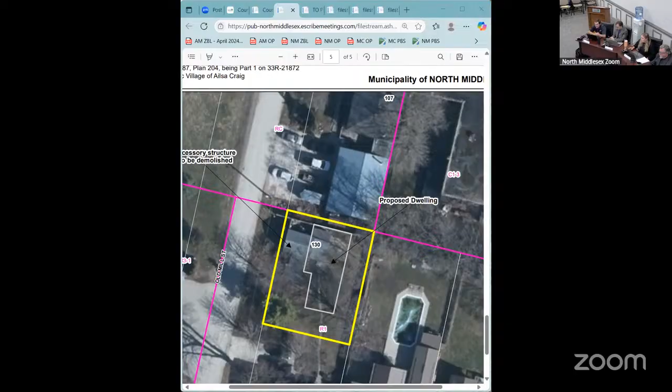This minor variance is for 130 Old Mill Street, located in the western portion of the Ailsa Craig urban settlement area, just south of the intersection of Old Mill Street and Ailsa Craig Main Street. The lands are predominantly residential in nature, zoned Residential Density Zone 1, and designated in the Official Plan as a residential area. The committee may recall that this property was severed from 132 Old Mill Street at the end of 2023, and this application is separate from that severance, specifically for a new residential dwelling on the lot created with that severance.

The owner is proposing to construct a one-story, single-detached residential dwelling approximately 1,100 square feet in size, with construction hoped to start in 2026. They have explored multiple interior layouts and determined that minor variance relief will allow for the most comfortable and functional living space, providing flexibility to incorporate a home office. The design ensures sufficient outdoor green space is maintained, that the character of the area is maintained, and that sufficient parking will be provided without vehicles encroaching onto the road allowance or interfering with snow removal.

Relief is being requested from the front yard setback, the rear yard setback, and the front yard porch encroachment. For the front yard setback, 6 meters is required, whereas 4.5 meters is proposed—this is only for the portion of the dwelling that excludes the garage, as shown on the building envelope map. The 6 meters will be maintained for the driveway and garage so there's no vehicle overhang onto the road allowance and sufficient parking can still be provided on site. For the rear yard setback, 6 meters is required, whereas 4.5 meters is proposed. For the front porch encroachment, 1.8 meters is permitted, whereas 1.98 meters is proposed.

The application was circulated in accordance with the Planning Act to all required agencies and landowners. Any comments received prior to submission of the report are outlined in the table, but generally the Ausable Bayfield Conservation Authority, Canada Post, Enbridge, the county engineer, the Thames Valley District School Board, and the municipality's building department, infrastructure and operations department, and drainage superintendent have all noted no concerns, and no comments have been submitted by members of the public to date.

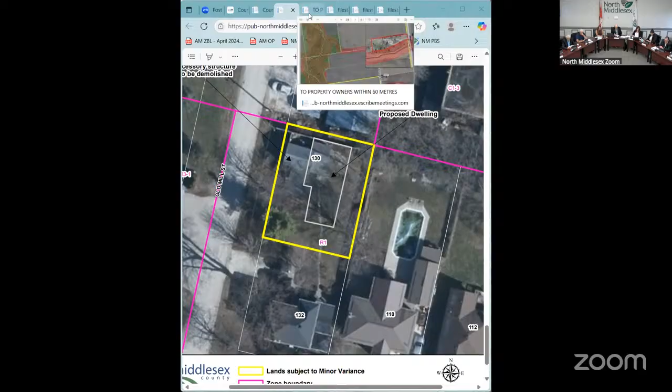Our next one is a notice of public meeting to consider application B13 2025, located at 35661 McGuire Road. Welcome, Mr. Hendrick. How are you? Thank you, your worship, I'm well. Good. All right, Ashley, go ahead.

This consent is, as noted, for a surplus farm dwelling severance at 35661 McGuire Road, located just north of Adair Drive on the west side of McGuire Road. Surrounding uses are predominantly agricultural in nature. The lands are designated as an agricultural area and contain hazard lands and woodlands in the official plan, and they are zoned as general agricultural and environmental protection in the zoning bylaw.

A portion of the lands, as I noted in my report, are regulated by the Ausable Bayfield Conservation Authority, which is the red hatched area on the map, and the green hatched area is what is classified as significant woodlands. So the applicant is proposing to sever approximately 1 hectare, or 2.47 acres, from the existing 100-acre farm parcel.

The severed parcel would retain the existing single detached dwelling, 4 residential accessory structures, and 1 former silo that is used as a decorative landscape feature and is not capable of being used for modern agricultural practices. The retained parcel would continue to be used for agricultural cash cropping purposes, and no change of use is proposed to either the severed or the retained parcel.

The application was circulated in accordance with the requirements of the Planning Act, and standard conditions for a surplus farm dwelling severance have been provided by the agencies that did make comment. Canada Post, the County Engineer, Entegrus, and the School Board noted no concerns.

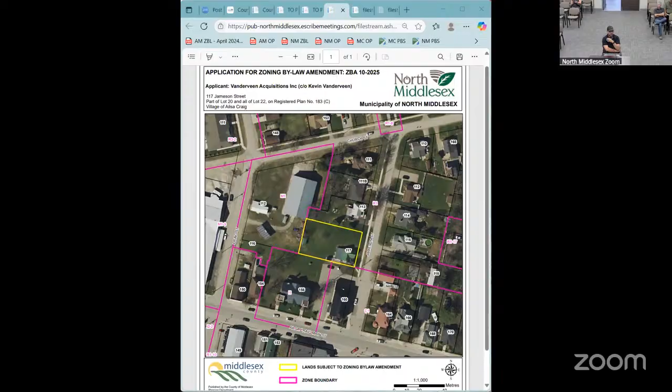Yeah, we haven't changed the rendering yet. We may change some of the materials, but after consulting with staff again, we decided that the building itself would be conducive to the era that it's built in, modern. And I think from a cityscape perspective, to change up the transition between new and old, it would still suit the neighborhood.

Okay. Councilor Cornelison. Thank you, Mayor Ropp. My question is for the applicant.

Have you decided to get these units out of the ground, above ground, or are you going to stay with the 2 units below ground? You know how I feel about it. I do. We still have one that's partially below ground. However, we're building one similar, and the window sizes are letting all kinds of daylight in. So I would think that the basement units are still full of daylight, and I don't see any problem with them being partially underground. Yeah, you're not living in it.

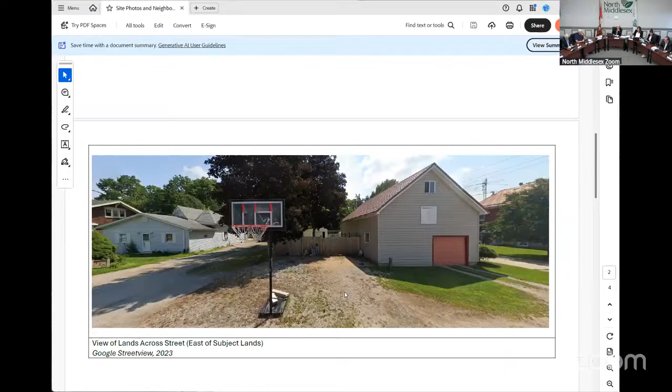Any other questions, comments? No other questions or comments? We have a recommendation in front of you. What's your wish? Moved by Councilor Irwin, seconded by Councilor Nerda. All in favor? That is carried, sir.

Deputy Mayor? Comment to Ashley, if I may, and through you, Mr. Mayor. A lot of those aerial site plans, I'm very familiar with a lot of them, some of them I'm not. I just wondered, when they say to the east and to the west, can there be just a north direction put on some of them, so when I look at the ones I'm not familiar with, I know which direction things are. Can that be put on some of those drawings? Yes, certainly, I can ask the mapping department to throw that on. That's not an issue.

Okay, thank you. All right. I would like to, if it's all right with council, move one report earlier, and that is report number 8-3, the drainage superintendent. Joanne, if you're ready, I would move your report forward. That's on 59-2025, the Grace Lewis drain. Do you have someone to come up? Yes, Brandon from Spriet. All right, we're gonna start with Brandon.

Good evening, everybody. My name's Brandon Widner. I'm one of the engineers at Spriet Associates who was appointed on this project. We were appointed on this late last year. We had an on-site meeting in late January, and then we had another preliminary meeting with the landowners in August.

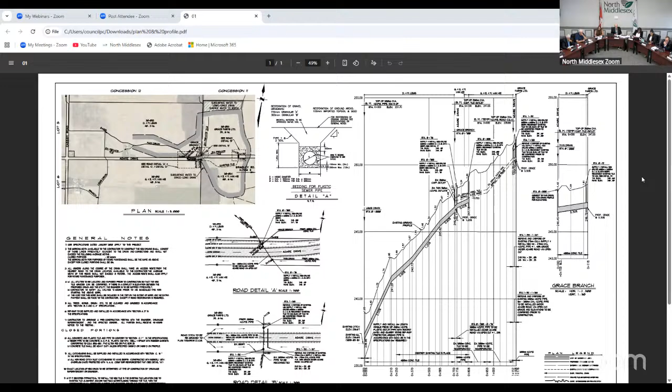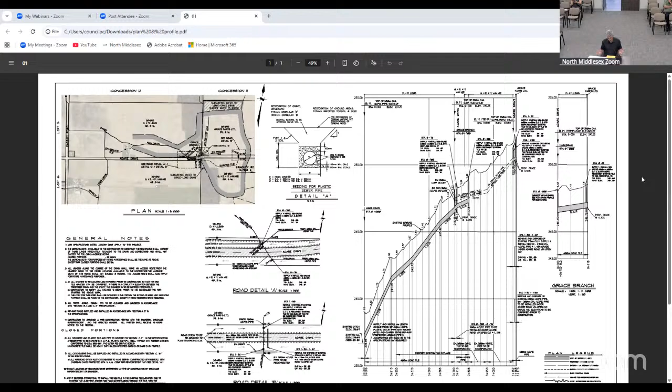So tonight we have a new drain. This drain is tributary to an existing drain called the Lewis Drain. This is located in the area of Adair and Cassidy Road. We had a request originally received from Grace Farms Limited. Their farm was in concession 11, lot 5. It was recently tiled. There is no municipal drain or outlet for that property. He was looking for approximately 2 outlets for the recent tiling that was completed. So that's what initiated the project, and that's kind of what you see today.

So today we have a new drain being constructed, which we're calling the main drain, and then we also have a branch which serves the Grace property, ironically called the Grace branch. The drain will start down on Lewis Drain and Danny Lewis's farm. It then goes around his homestead or barnyard, goes up the property, basically parallel to Adair, then crosses Adair and enters the Van High property. The Van Highs did some tile work in the past. We're going to incorporate what's there and utilize it, but we are going to install a new road crossing on Adair, as well as the branch up to Grace's.

Now, the owners were all present at all the meetings to some extent. One was, I guess, attending virtually. We have upsized the drain beyond the typical standard. Usually municipal drains are designed to 1.5 inches in 24 hours. This one is a size above that based on the owner's requests, but that's what they were all looking for.

So total cost of the project is approximately $162,000. There is an assessment to Adair Drive for the 2 crossings, as well as some assessment because currently all the tiles are outletting into the road ditch on Adair. That will be rectified and installed into this new system. So I know some of the owners are here tonight, but if anyone has any questions, I'd be happy to answer them.

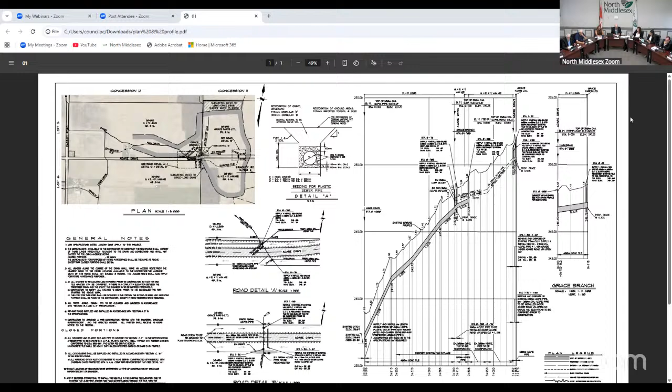Councillor Knellison: I have a question for our engineer here. Can you share with me the rationale why the municipal cost of it is like almost a third of the total cost? It's like $50,000 just to go across Adare Road. Is that true?

Not entirely. There's a couple components to your assessment. There's two crossings under Adare. One is located in Danny Lewis's over to Van Hie. Another one is from Van Hie to the Graces. Those crossings are assessed with special assessments, broken down on page 5 of the report. Approximately one is $10,000, for a 12-inch subsurface pipe—we're not installing a surface culvert there. The other one, we are going to install a new surface and subsurface, further up the road to the east. That's approximately $12,000. So there's approximately $22,000 of your assessment.

If I remember correctly, your total assessment is more. There is $28,000 also assessed.

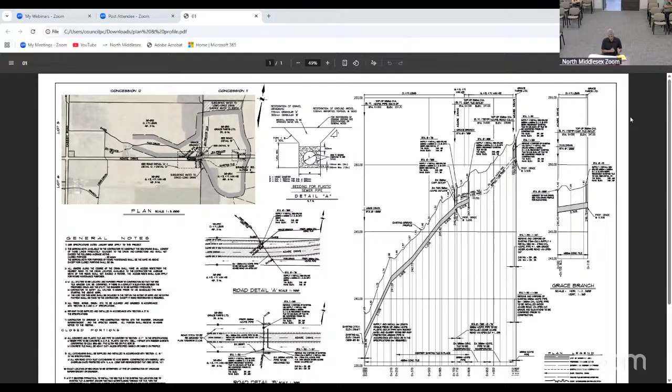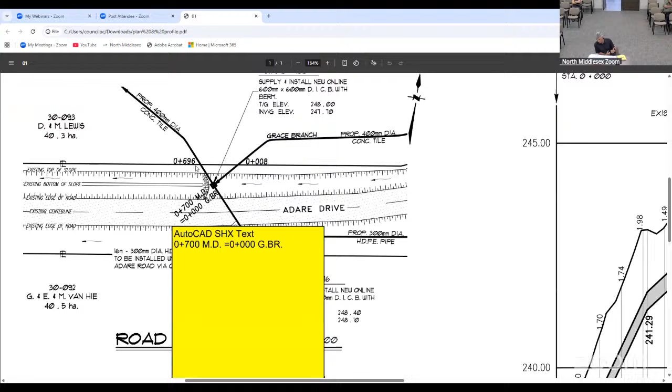Now, when you look at this situation currently, the Grace Farm is relying on private drainage currently, which is outletting on Adare Drive. The Van Hie Farm is doing the same. If you go to the plan, station 696, essentially where everything comes in, there's a detail there in the middle of the page. Everything currently is dumping in the road ditch. In order for me to give the owners a new and improved outlet, I need additional depth. If you look on the profile, those are all outletting in the road ditch, approximately 2 to 3 feet deep. The new proposal will be 4 to 5 feet deep.

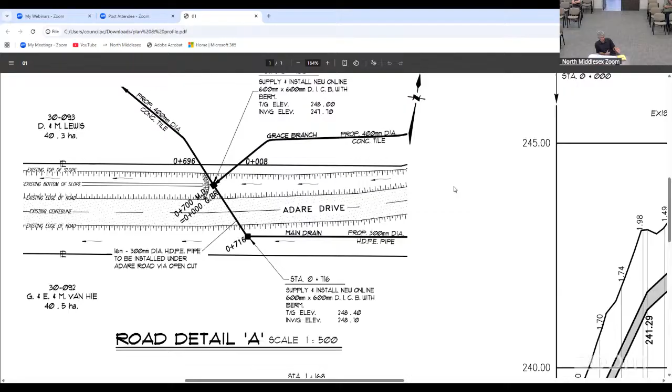So in order to push the drainage off Adare, which we typically don't want municipal drains on the side of a road, there's some cost for that. Currently, if you look at Danny Lewis's farm, he's not taking all that water—he's draining some of his lands, some of the Grace property. Now all the water is going to go on his property, which currently went on Adare. So it's pushing the water off of Adare onto the Lewis farm. That's where you're picking up some of the assessment, which in turn lowers Danny's assessment, but he's currently not taking that. That's where the assessment's coming from. That being said, it is an estimated cost. If it comes in lower, everyone will save. If it comes in higher, unfortunately, everyone pays a bit more.

So that leads me to another question. All the water is going to Mr. Lewis's farm—is he able to discharge it? Where's he able to drain it to?

So everything goes down to what is called the Lewis Drain. Currently it goes down Adare Drive, runs over or under his laneway, goes down to that culvert. Another thing you are seeing is there is a surface run in Danny Lewis's that runs through the middle of his barnyard. In order to make everyone's lives easier, we went north of his entire homestead to avoid doing his lawn, his driveway, all that disturbance.

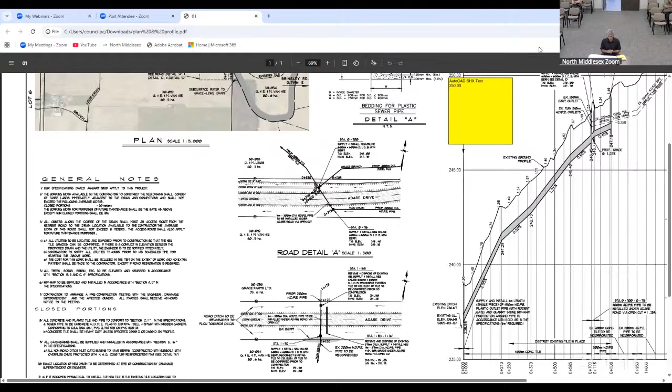Okay, thank you. Is there any other questions? No other questions on this. We have a recommendation which has been said—Councillor Keogh, seconded by Deputy Mayor Hodgins. All in favor? Carried. That is carried. Thank you. Thank you.

Thanks, Joanne. Our next item is a delegation of BM Ross on the road needs study results. And Ken, I think you're coming. Yeah. Thanks, Joanne.

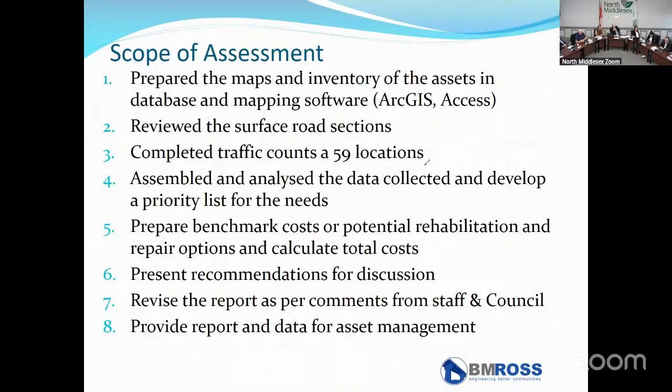I clicked on something. Sure. There, okay, working. Okay.

There, go back up. Talk about the traffic counts. So a comprehensive set of traffic counts was collected at 59 locations, and these were collected over 3 days in the spring to provide a good database. We calculated the AADT at the assessed locations and extrapolated to assess the traffic on other roads through consultation with staff.

Just to clarify, AADT is the average annual daily traffic on each section of road, and that includes traffic going both ways on that road. The AADT is used to help predict the deterioration of the roads and to help prioritize the needs. The assessed traffic ranges are also used to help define the maintenance class for each road section. Traffic range and maintenance class maps are provided within the report.

The road assessment methods: the MTO has a methods and inventory manual that was created in 1991, and we've used that as a guide for how to assess the roads and prioritize the needs. It's a fairly simplified method, but it's been effective and used by a lot of different municipalities with a similar approach. We assigned ID numbers for each road section, and surface and structural condition ratings for each of them.

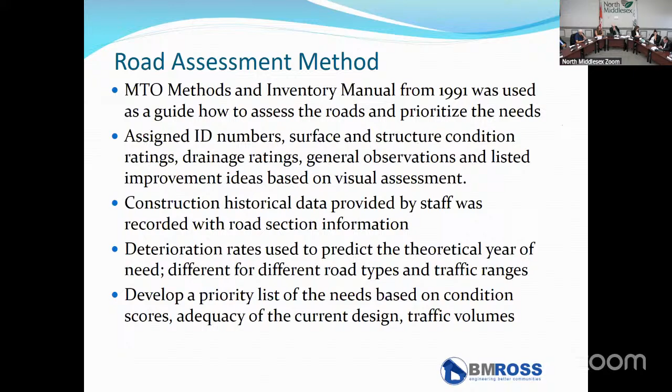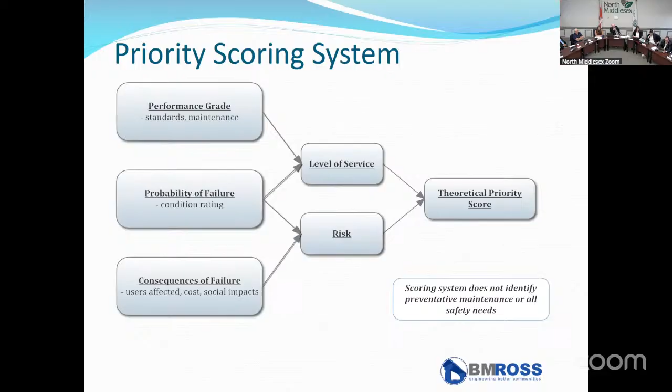The next slide talks about the road inventory. This is a summary of the information we gathered. The first table in the top left corner shows the amount of gravel roads, HCB, and LCB roads you have. You've got a total of 467 kilometers of roads: 363 of them are gravel, 100 are HCB with two or three lifts, and a few kilometers of each of the others. HCB stands for high class bituminous, your traditional paved roads, and LCB is low class bituminous, your tar and chip roads.

On the top right corner, we have another slide showing the roadside environment—whether it's an urban, semi-urban, or rural road. Your urban roads have curb and gutters. Semi-urban roads have a road platform with a shallow swale on the side, and maybe ditch inlet structures that catch the water. Rural roads are the traditional ones out in the country where you've got a full ditch and the water just runs down towards an outlet. It lists the kilometers of each, with most of your kilometers, 436, being rural roads.

On the bottom, we provide this table, which we usually use as a guide to see whether we're keeping up to the amount of work that should be done on a long-term basis. We've provided the assumed life expectancy for the different road types. For gravel roads, we've assumed 100 years of life. Generally with gravel roads, you mostly just do maintenance on them, either by staff or whatever. With a 100-year life based on the number of kilometers of road you have, that means you should be fixing about 3.6 kilometers of gravel roads every year.

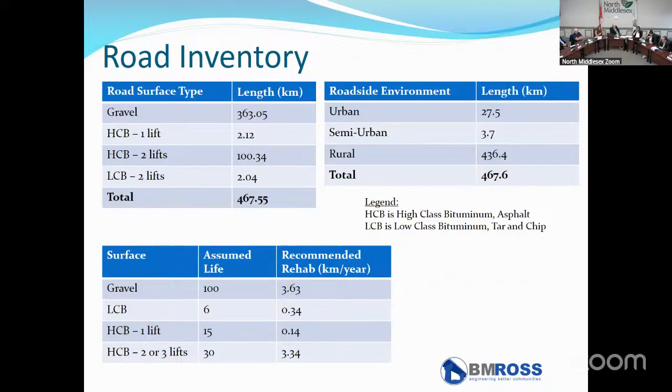The condition rating for the road sections is presented here in the table. When we do our condition ratings for the roads, we assign two components. One pertains to the road surface itself—the asphalt on top, or the crust on gravel roads. The second we call a structural rating. Our trained technicians doing the review look at the road and ask, is there something here suggesting this road base is not performing well? Do you have wheel rutting? Issues with drainage? Other factors? Those are incorporated into the structural rating.

You can see your gravel roads scored 7.6 to 7.7. The LCB is 7.4 to 8. The HCB is 7.4 to 7.5. Overall average is 7.6 to 7.7. To clarify what those scores mean: a brand new road would score 10, and a road that's time for rehabilitation would score 5. They traditionally don't use 1, 2, or 3—that's for a dirt road sort of thing. So having scores in the 7.6 to 7.7 range is about the middle of the range, about where you'd like to be—roughly halfway through the life of the road surface.

The table below is just a graphical representation of the same scores shown above, which kind of shows they're in the middle there. Most of them are in the center for the gravel, and similar for the HCB, they kind of come off from the new and then move into that center category pretty quick usually.

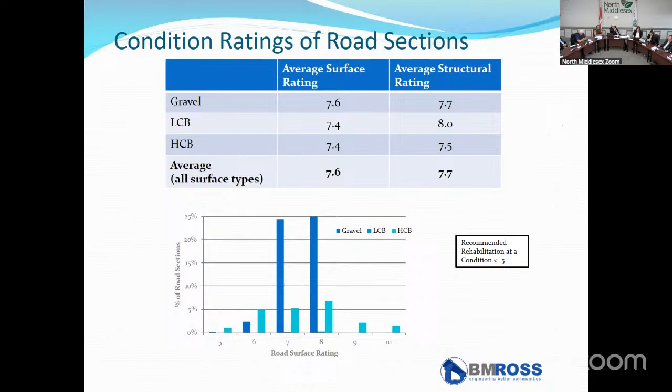We'll talk about our observations pertaining to the HCB, high-class bituminous roads. The roads with surface condition ratings of 5 or lower are due for rehabilitation. But with HCB roads, if they have scores in the 6 range, they'd typically be due for some rehabilitation work in about the 5 to 9 year period, based on the deterioration rates you typically experience with high-class bituminous roads. In rural areas, most of the paved roads are in fair to good condition.

Many paved roads would benefit from some shoulder maintenance work. In Parkhill, roads ride very well, with most surfaces being in fair condition. However, some surfaces are tired and you've got a bit of wheel rutting and cracking starting to show up. Drainage appears to be in good to fair condition within that area.

In Ailsa Craig, it was noted that the roads are generally in fair condition, but many may need work over the next 10 years. Drainage appears to be in the fair to poor condition range.

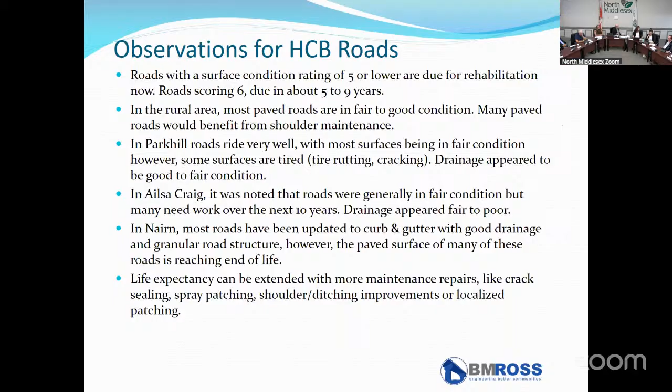Observations pertaining to the LCB roads: all of the sections will need to be resurfaced within 10 years. That's just normal with LCB because they only last about every 6 to 7 years, so you have to do a resurfacing of them.

The LCB roads appear to be performing well in some areas, the through road areas especially, but not as well near the dead ends of some of the roads. And we suspect that has to do with - you've got some good granular base, but the drainage is maybe not as good near the turnarounds at the end, at the cul-de-sac areas.

LCB roads' performance is affected by the amount of traffic, the weight of the traffic, what kind of base is in the granular base within the road, and drainage. And sometimes if you don't have enough shoulder to provide some protection for that surface, it starts cracking and moving along the sides.

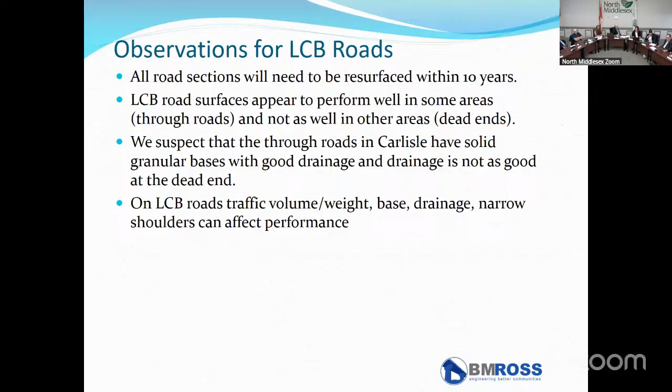Observations pertaining to the gravel roads: most of the gravel roads are in fair to good condition. We typically are only recommending some maintenance work on the gravel roads that can be addressed by the municipal staff, i.e. some ditching work, brushing, or widening.

Many of the gravel roads would benefit from some drainage improvements. A few of the gravel roads should be raised to reduce the potential for flooding over top of the roads. Continued drainage improvement efforts such as ditch cleanouts and brush removals would be encouraged.

Another common observation concerns encroachment of agricultural lands onto the right of way. This negatively affects the performance of the road because you don't have your ditches to provide the drainage that you should have. So we're suggesting some sort of ditch reclaiming program should be considered, and you'd probably start with the roads that are more heavily traveled, then work your way from there.

Some of the gravel roads have a soft surface early in the spring, and that's not uncommon. Usually that's acceptable for a short period at the start of the spring. It's a bit of an inconvenience, and then as township staff work through it, they usually come along and do all right.

Drainage would probably help if there's areas that are really bad, then it might be a case of the drainage isn't performing that well in that area. To sustain the existing level of service for the gravel roads, we recommend the current maintenance programs be continued to at least the same level or better to maintain them.

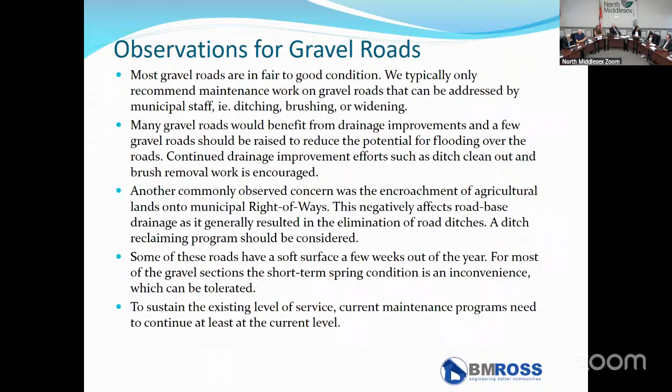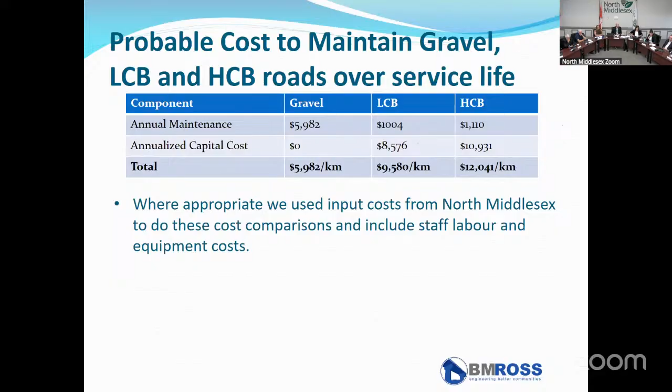Factors to consider if you do want to change from, say, gravel to HCB. With the gravel, yes, you do have a few bad weeks in the spring, but usually you can fix that up with a grader fairly soon afterwards. Gravel roads tend to provide a softer surface in spring, especially when it's wet. I guess we've got that note kind of in there twice.

Gravel roads, a lot of municipalities, they start thinking at about 400 vehicles a day is kind of a threshold where they start to think about switching them from gravel to LCB or HCB. That's kind of a typical number that people start considering it. But if you are going to switch a road from gravel to HCB, or high-class bituminous, we'd recommend you do a geotechnical report to investigate the base of the road, what kind of condition it's in. Are the granulars good? Do you have issues with too much silt and fines within the gravels, or is it good condition?

Road improvements, if you do road improvements from gravel to one of the others, it tends to increase the need for maintenance and winter control because now you're going to have more traffic. Those roads will draw more traffic towards them. The cost for the gravel and calcium are increasing each year, but so are the costs for the road salts, the sands, high-class bituminous, the crack sealing. Everything's going up in costs. And one other thing to keep in mind is once you increase the level of service, say you move it from a gravel to an asphalt road, it's very difficult to move it back the other way.

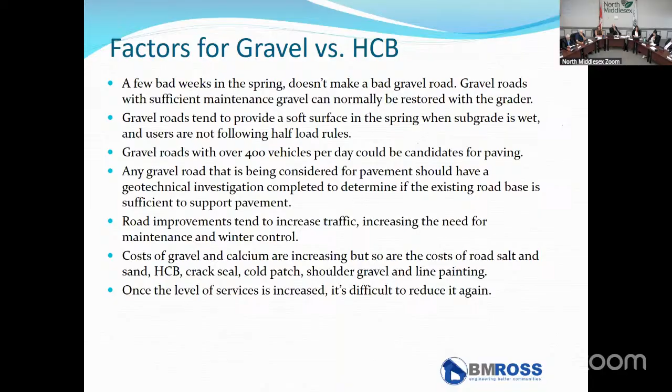So next slide, I'm going to talk a little bit about minimum maintenance standards. Road maintenance in Ontario is governed by this regulation 239/02, which is a minimum maintenance standards for municipal highways, which also includes requirements for sidewalks and bike lanes. The classification of highways is based on the speed, the average daily traffic volumes on those roads. And those classifications, they're used to determine the applicable minimum maintenance that's required by your staff.

Minimum maintenance standards include things like patrolling frequencies, winter maintenance like snow and ice removal requirements, roadway maintenance needs, if you have potholes and cracks, sort of how quickly they should be fixed, signs, luminaire inspections, minimum timing for temporary and permanent repairs. The table at the bottom, we kind of listed with the road classes down the left-hand side from 1 to class 6. One would be like a freeway, so we don't need to worry about that, but you can see most of yours are in the 3, 4, and 6 categories. And you can see the number of kilometers that are included within each, with most of them being in the 4, 5 and 6 categories.

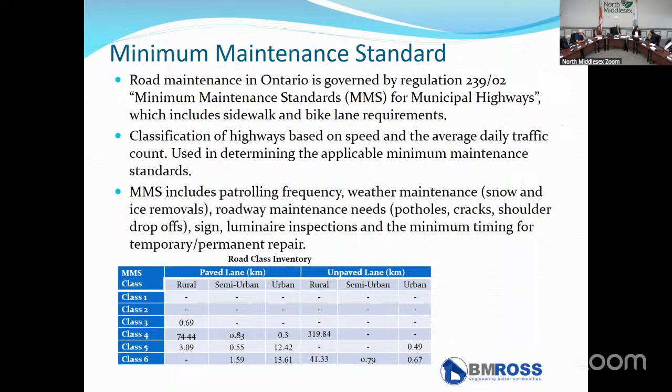So minimum maintenance standards, continuing on with that, examples of some of the requirements. For example, with the frequency for patrolling, with a class 3 road, it's every 7 days. Class 4, it's every 14 days, and a class 5, it's every 30 days.

Snow accumulation, there's requirements based on the amount of snow that you accumulate, how soon they're supposed to be out there to do their rounds to remove the snow. Ice formation, how quickly they'd be out there, pothole repairs - we've got 7, 14, and 30 days. Shoulder drop off repairs are listed in there as well.

Now, we didn't list the requirements for class 6 because a class 6 road isn't required to comply by that. A lot of municipalities try to build it into their class 5 categories, but a class 6 road is basically a road with less than 50 vehicles a day. So some of them might be no winter maintenance roads and things like that, since they don't have a lot of traffic on them anyways. So that's the status for class 6 roads.

With sidewalks, this includes the requirements for annual inspections to check for discontinuity or tripping hazards. There's requirements for winter maintenance as well. We didn't get into the details here, but those are the features that are required with the sidewalks. With the retro reflectivity on your signs, they're to be checked every 16 months.

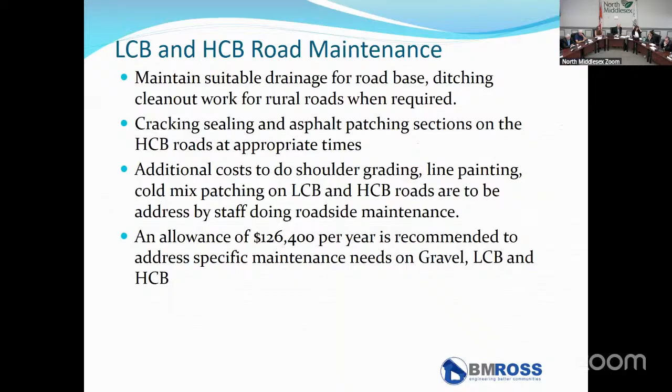With gravel maintenance roads, maintaining suitable drainage on the sides, clean out ditches, tree removals, trim back the trees that are encroaching over the roads. To improve drainage, consider your ditch reclaiming program in locations where the agriculture is encroaching on the road in the right of way.

Grading the road several times a year to minimize potholes, resurfacing the roads with well-graded material. Calcium chloride, typically applied annually if you've been doing that, helps to maintain a crust on top of the gravel roads. That helps to shed the water and helps with regrading of the surface to take away inconsistencies in the road - sometimes you get that waving action that shows up.

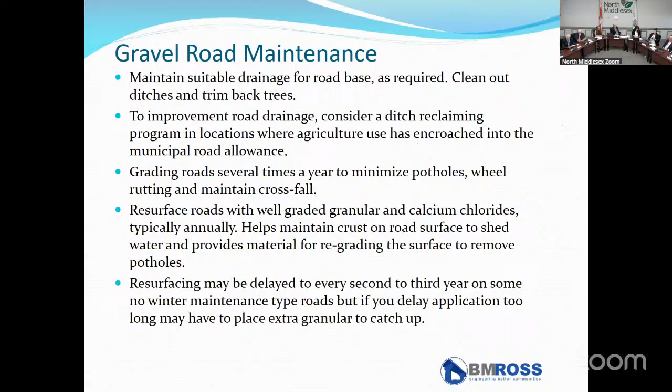Resurfacing may be delayed every 2nd or 3rd year on some of the roads that don't have very much traffic - I think you're already doing that on some of them already. But if you get too far behind and don't put enough granular on it, it will catch up in the future, and sometimes you get spongy roads and have to do a whole bunch of catch up. So you have to be careful you don't get too skimpy on it.

So some general comments: no upgrade surface types are being proposed with the plan the way we have it - that's like going from gravel to one of the others. Upgrading roads to LCB or HCB can create increased traffic volumes, and we found that with Google Maps and stuff like that - if you have a paved road, all of a sudden everybody takes traffic down them. Some clients' roads have really jumped in traffic; they come off the provincial highway and start using their roads. The road study creates priorities based on the road conditions.

There are other infrastructure needs within the municipality that you have to take into consideration. So sometimes it's appropriate to delay some of your road work so you can do all that work at the same time. You may have to do some patching, or shuffle your schedule to incorporate other needs, and we recognize that.

So this is provided as a suggested timeline for doing the work, and staff may have to adjust things. When creating the proposed schedule, efforts were made to group similar projects in close proximity to help with some economies of scale. If you're working all in one municipality, one village or area, it's usually more cost effective.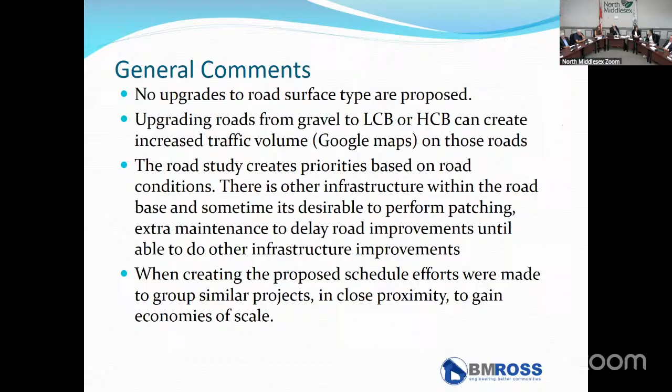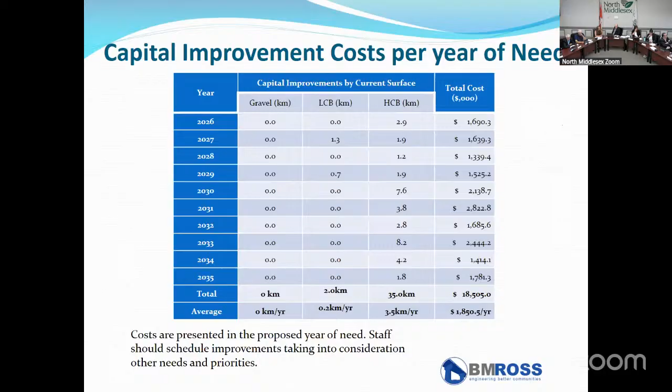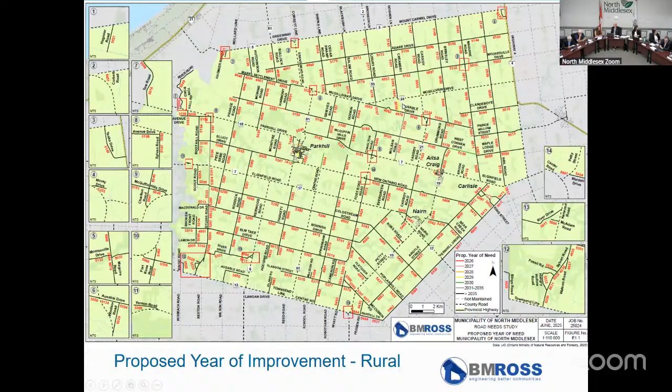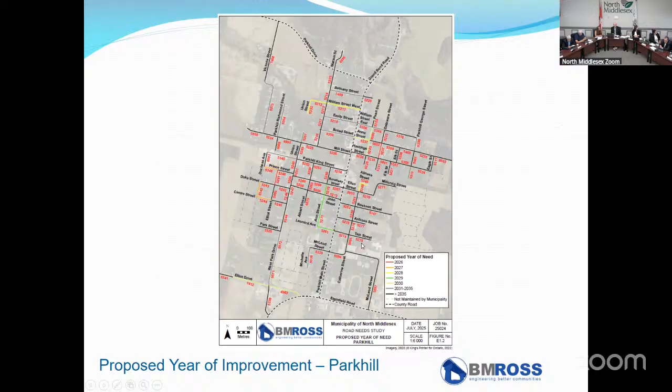We have some areas being proposed with this map. If you go to the next one, in Parkhill you can see different colors throughout, different roads with some recommendations within different years. And Ailsa Craig, similar, we've got some roads with suggested improvement years. And same with Carlisle, we've got another map for each of them.

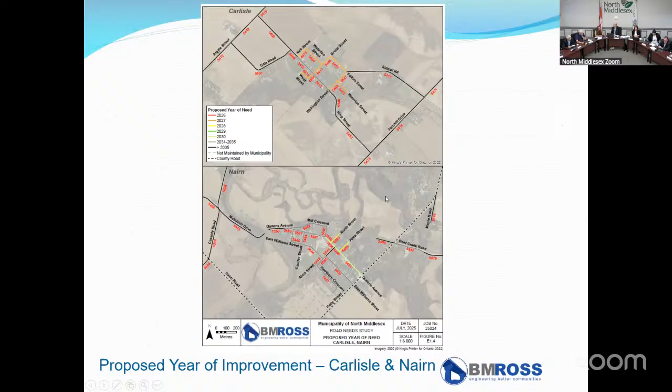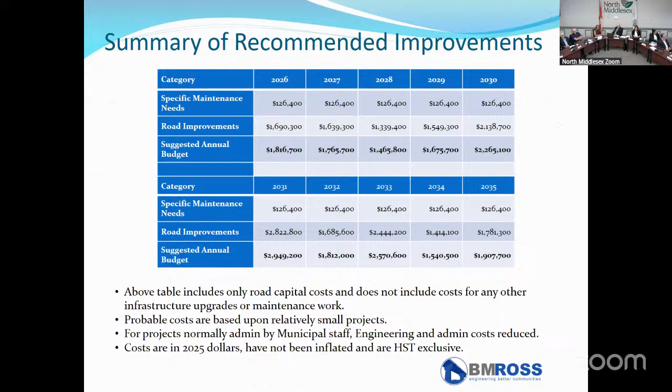So our concluding comments: recommendations to increase the maintenance and capital improvement budget slightly, the capital budget to about 1.85 million per year. Overall, road systems appear to be in fair to good condition, with several road sections due for replacement or rehabilitation. We've provided some priority scorings on the roads to help staff prioritize their improvements over time.

We recommend you allow staff some flexibility to line up with other infrastructure projects. The suggested budget numbers do not take into account potential cost savings if you were to get some economies of scale. By grouping things together, it might help a little bit with the pricing. The road needs are to be monitored and adjusted over time.

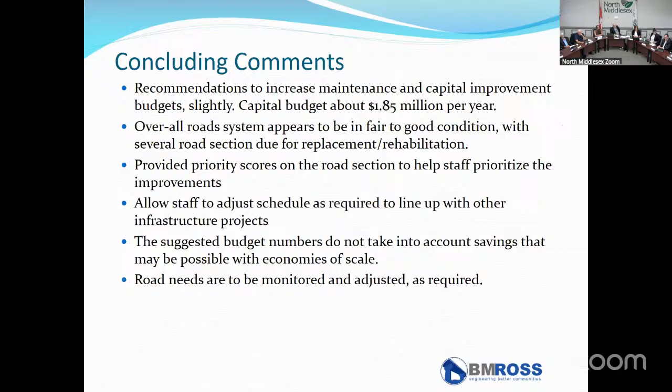So that concludes the presentation, if you have some questions. Okay, thank you. Who wants to start? Questions? Councillor Irwin? Thanks, Worship.

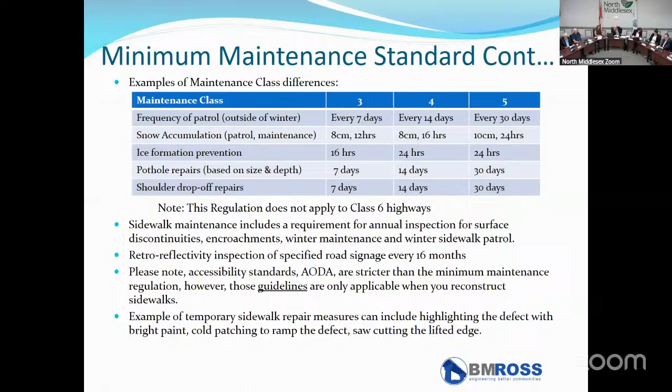I only have two questions. One refers to slide number 4, traffic count. Now the AADT was done in the spring, but some of our roads are under construction then. So how do we allow for the average counts for those roads being constructed or down to single lanes at that time?

When we do the traffic counts, we consult with the staff to some extent to try to understand, we have this information here and there throughout. I'm not sure how much it lined up with your construction. Did it line up very much with the construction or not? No, it didn't really affect the construction that much at all. We only did really about 59 spots, so it didn't really affect anything that way for construction wise.

I know in Queen Street North, your worship, I can continue. In Queen Street North, outside of Ailsa Craig, traffic was way down because of the work being done on the road resurfacing for the new water line. So I was just curious how that was taken into account. I mentioned that previously to the Director of Infrastructure. Traffic is just starting to pick up again on that road, so I'm curious about that.

I guess what I can say is we based it on the traffic count data that we had, and then we did some consultation with staff to see whether that seemed appropriate. We also had previous traffic data from previous years that we looked at for comparison, so we wouldn't have dropped the numbers down very much. We obtained all the county traffic count data that they had, which we provided, plus previous traffic count data as well. So it wasn't just the new counts, it was all the data we had and all the data the county provided us.

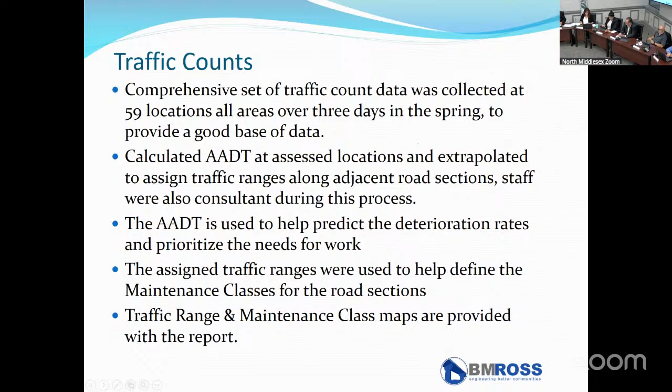To the mayor and members of council, before you this evening is report DYO 57/2025, which presents the results of the 2025 road needs study prepared by BM Ross Associates Limited. Key highlights: the study reviewed all municipal roads, 467.7 kilometers of road network, 363 gravel, 2 kilometers tar and chip, and 102 asphalt. Maintenance programs recommended ongoing include gravel and dust control, approximately 45,000 tons of gravel and 3 million liters of calcium annually, drainage and shoulder improvements, and protective road base. Pavement maintenance programs include asphalt rehabilitation, crack sealing, tar and chip program, slurry sealing, fiber mats, or micro surfacing. Sidewalk renewal and extension for safety and accessibility.

Capital plan highlights: the 10-year forecast is 18.5 million, covering rehabilitation of 35 kilometers of asphalt and 2 kilometers of tar and chip road. Peak spending in 2031 would be 2.82 million, covering 3.8 kilometers of asphalt rehab. The largest single-year rehab, in 2033, would be 8.2 kilometers of asphalt. All Carlisle tar and chip roads would be resurfaced together in 2027 for cost efficiency.